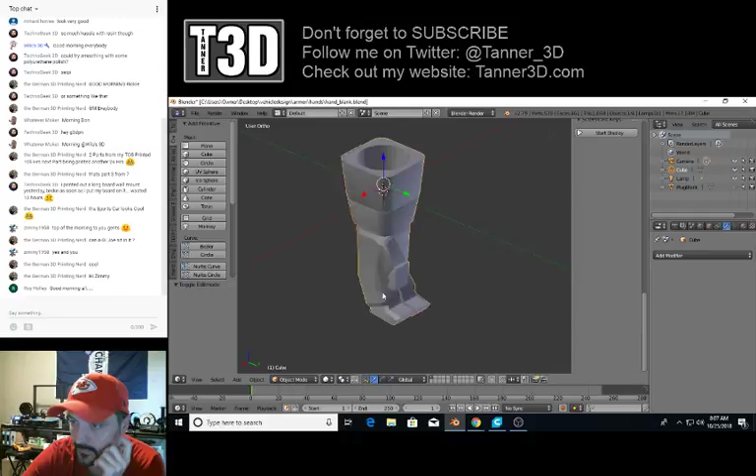Let's go to screen share. Let's move the chat over here. Pull Blender up - you can see this is where I was working on the gauntlet bionic hand claw thing for the G.I. Joes. There it is. Save it before I open.

What did I do with? Oh, there it is.

But yeah, I did the same thing with this big truck - I started with the Jeep and just started stretching and manipulating the vertices to make this big truck. So that's what I did for the sports car - I squashed it and stretched the front end, and then for this, I just kind of blew everything up, made everything bigger.

Yeah, I don't know, I don't have everything really organized today. So yeah, on this I still have to address the back door and the back bumper and the attachment points for the box.

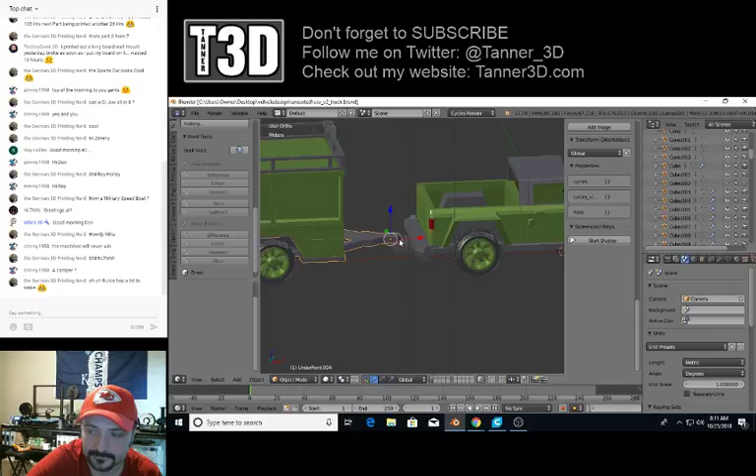Which I made a realization with the trailer. I think Roy Holley's already probably started printing his, but I'm going to have to make a different trailer frame for different vehicles. There's just not going to be any way around it because of the height of the bumper. The lower bumper is going to need the flat frame.

Yeah, more stuff to make than I will ever have time for. But yeah, I'll make a slide-in camper shell for this, like the big campers, like the one my father-in-law used to have, the great big thing you can sleep in and stuff. I'll make one of those for it, and then of course regular camper shells, roll bars. I've already got a lift kit for the Jeep that should work also for the truck. Should.

I stayed up way too late last night watching Ben Craig play video games and chatting with him on Facebook. He's playing Quake Champions. Pretty cool looking game.

Oh cool, True Tech. Yeah, I've seen those. That's where it's built on the little Toyota truck, but they put like a 1-ton suspension on it, right? I always thought that was cool, that when they take those little trucks and put big suspension under them.

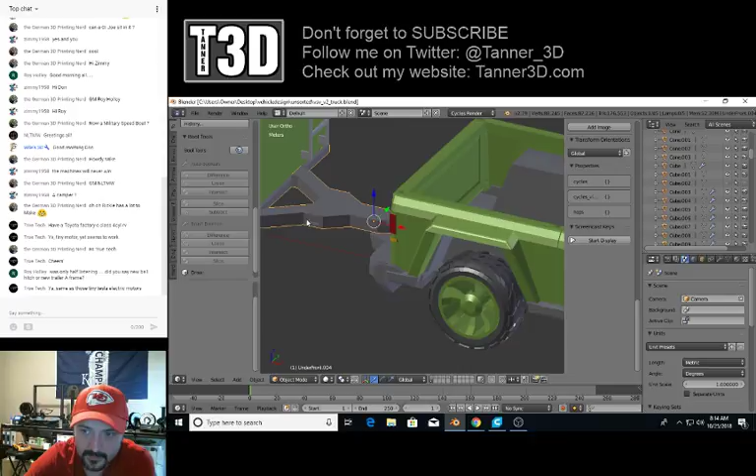New trailer frame. Well, more than one trailer frame. So it's going to have different, either that or I'm going to have to separate this front piece of the trailer from the rest of the frame so that you can choose which one to print.

Now, the thing I'll say about gearing making a difference is you have a tiny engine, you can gear it up to have more power, but a smaller engine is going to typically wear out faster working harder. That was the case with my 1985 S10 extended cab 4x4 when I was a teenager - it had that 2.8 liter V6, and that combination of gearing and stuff, it wasn't enough engine for that truck.

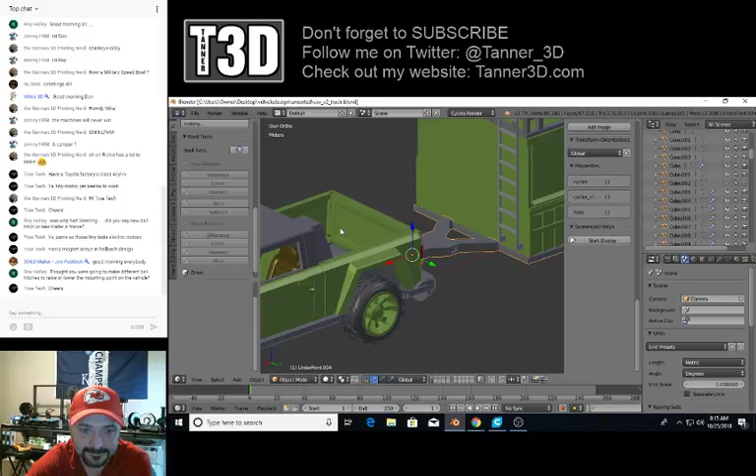Morning, Joe. How'd your work call go last night, man? Oh, till 3 a.m., dude. That sucks, man. I bet Joe wishes it was more good night than good morning. He just got done working a few hours ago - are you on your way into work now, after being up last night?

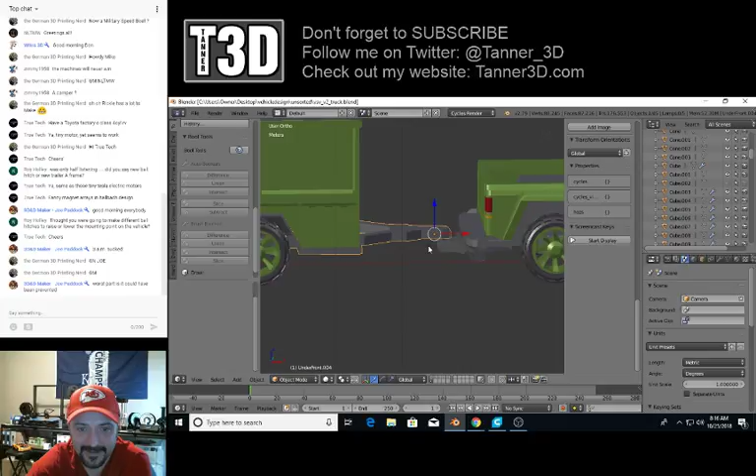Most things like that can be prevented, really.

But yeah, I tried using the trailer frame that goes up like that - I'll just show you. I'll copy it and go back to the truck, paste it. So yeah, I tried it, but then I had to make a hitch that went way up like that, and it looked really funny.

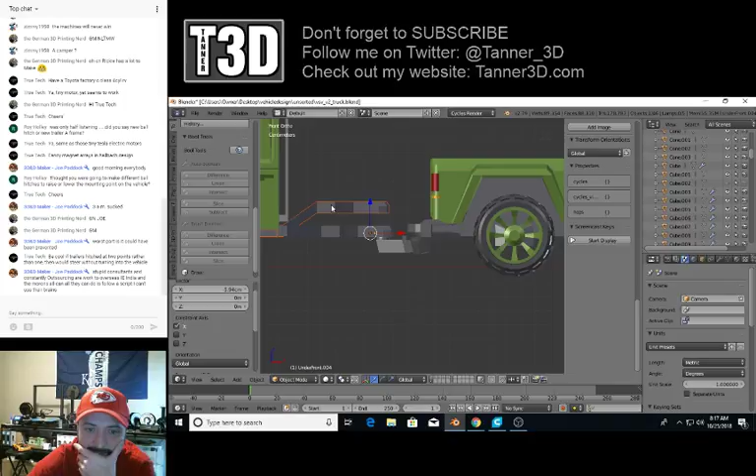So I may need to look and see if I can do the flat frame and make a hitch that works with the Jeep and the lifted Jeep with the flat frame, which would mean changing up the hitch. But that shouldn't be a big deal to reprint because the hitch is small. But if you've already printed the trailer frame, that's going to suck.

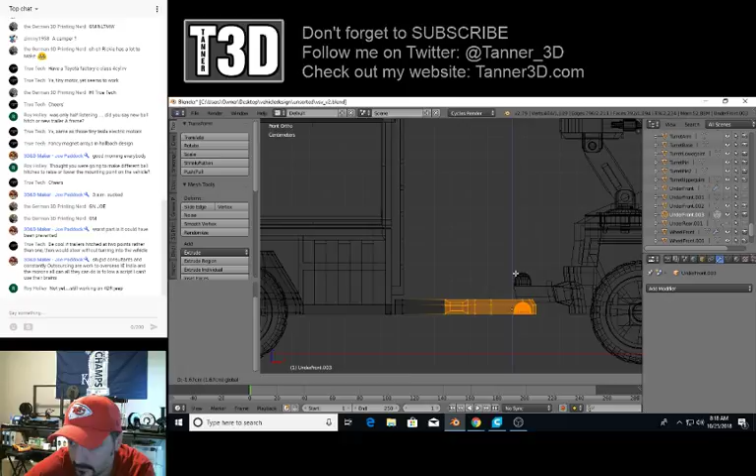Oh, okay, well then maybe we still have time. Let's do this, let's flatten this out. Grab the whole trailer - oh, tab out. Grab the whole trailer. Slide it back some. Now let me investigate what I can do here.

Although, wait, I could be looking at this wrong. Let's do this. But separate that out right now.

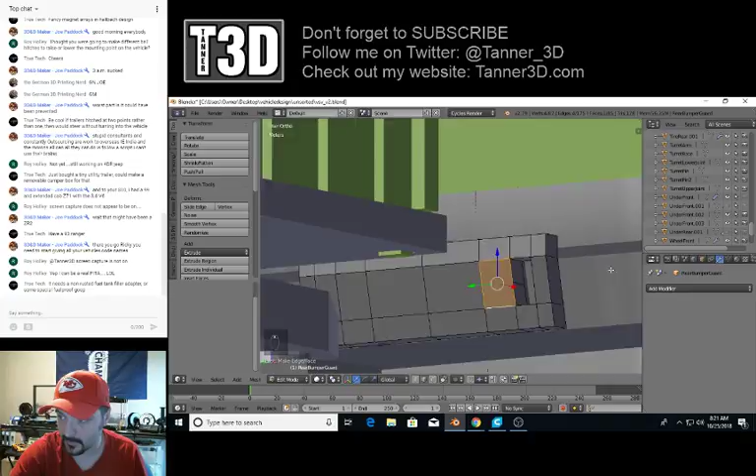No, Joey. Wait a minute. I didn't want to... That one I didn't want to make a face on. That one's... okay, cool.

So instead, I need to look at this as... extrude. Oh, not the Y. X. There we go. X. You think of this as this sort of thing here.

Wait, let's do that. Extrude it out again. Not like that.

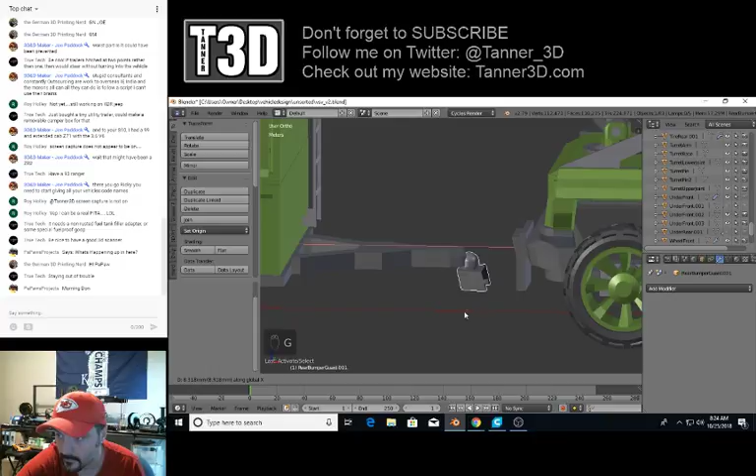Alright, so if I think of the hitch as having a drop more like that, then... not create tools, join.

Huh. Yeah, I have no drafting skills. Up here, make those line.

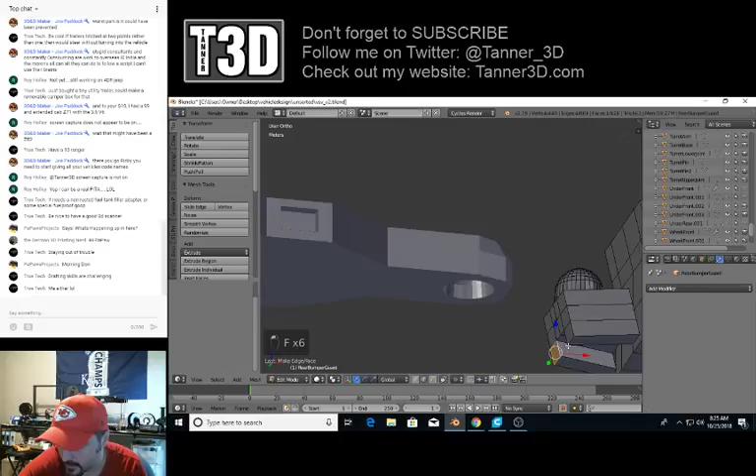Well, thank you. Thank you, True Tech. Appreciate that, man.

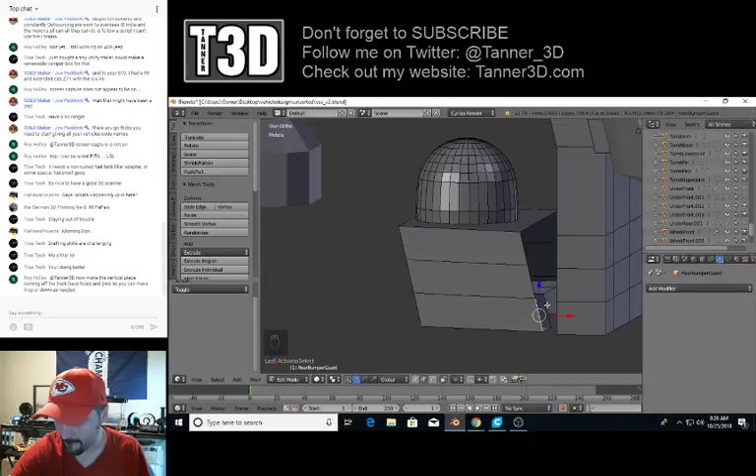All right. So then we can let me get rid of that face. That face, that face, that face. I think this will work. Hold on. We'll see.

Do that. Go here. Select that. And that. Select that. See if we can bridge these. Kinda, sorta.

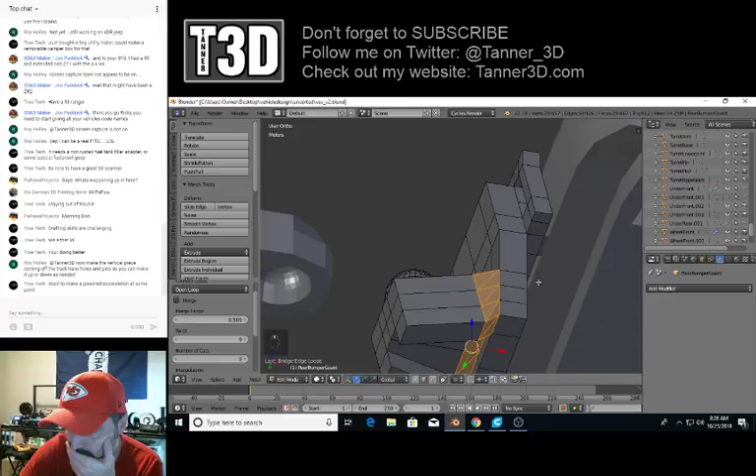It did some funky things there, though. Let's undo that. Looks like we're gonna have to manually bridge them because it's not gonna want to do that. Try it again. No. It can't reconcile that properly. So we'll manually go through and bridge each one of these.

Oh, that's why. Not the same number of faces. Alright, it'll be okay. It'll be okay.

Okay, Marty. Alright. So if I think of the drop hitch more like that,

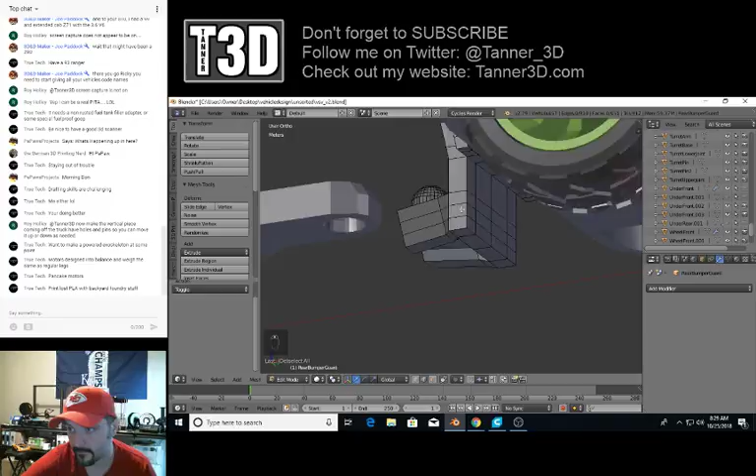But I think this solves our problem of the trailer, and then I just put up the flat one of these, and then we just adjust the length of the drop according to the height of the vehicle.

And then you print whichever. If you're printing the truck, it'll have less drop. If you're printing the standard Jeep, it'll have the medium drop, and then if you're doing a lift kit, you'll print one with the big drop.

Yeah, that's it, for FDM printing anyway. You start talking about pretty small holes and pretty small pins, and pins that small, you might put them in once, but you're not going to pull them back out and put them back in repeatedly without breaking them. It's just the nature of it.

And I've been trying with my designs to avoid needing any hardware or parts that aren't 3D printed.

My concern right now with this is being able to take the tension of pulling the trailer, and thinking I may need to do something like

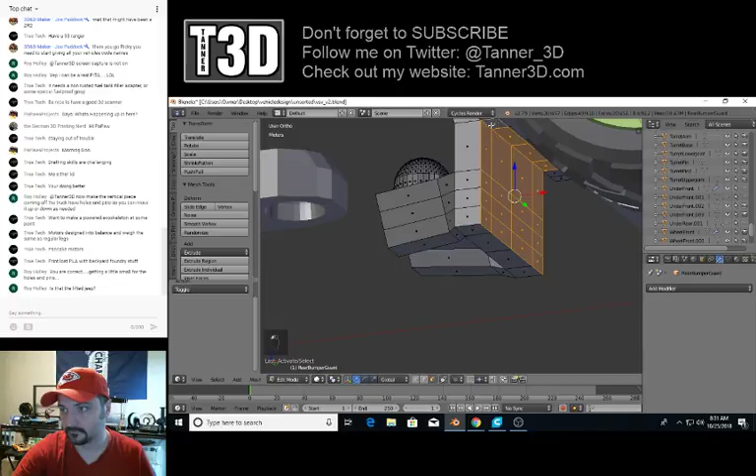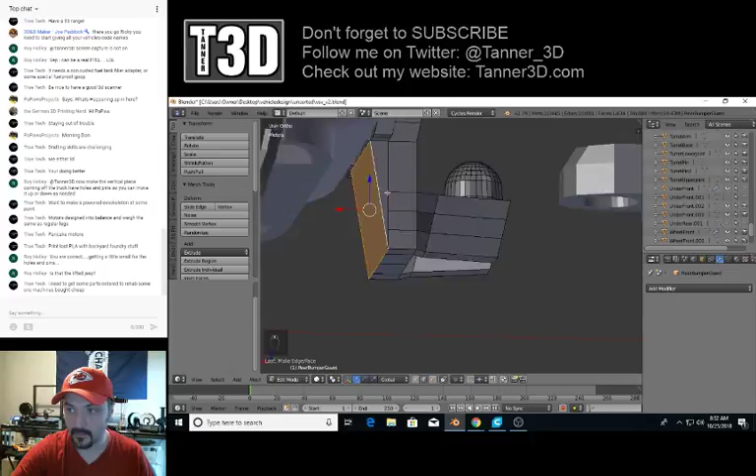It may be better to do something like this, right? Here. That would give it a little more strength.

Yeah, I seen Inside the Mind of Matt does a lot of that Lost PLA Foundry stuff. Anyhow, so I think, yeah, Inside the Mind of Matt's got a lot of, got several videos on doing Lost PLA Foundry stuff. So yeah, check him out if you haven't. He's a good dude and awesome maker.

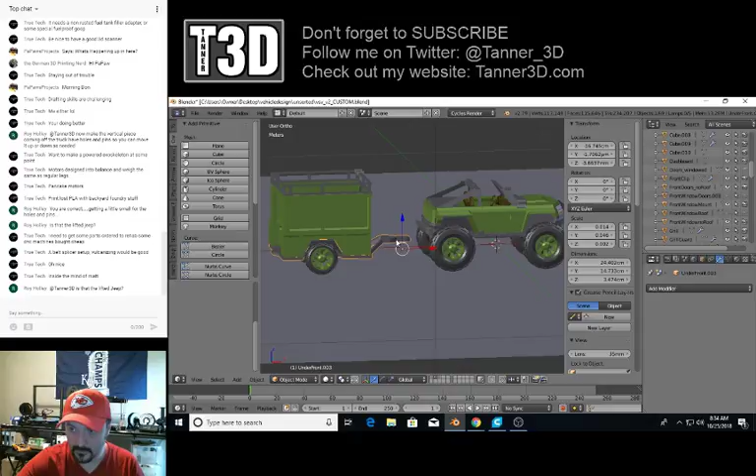Let's hide that. Let's tab into that. Let's flatten out the trailer. Tab out. Paste. Into that. So now I should be able to literally take and just drop that.

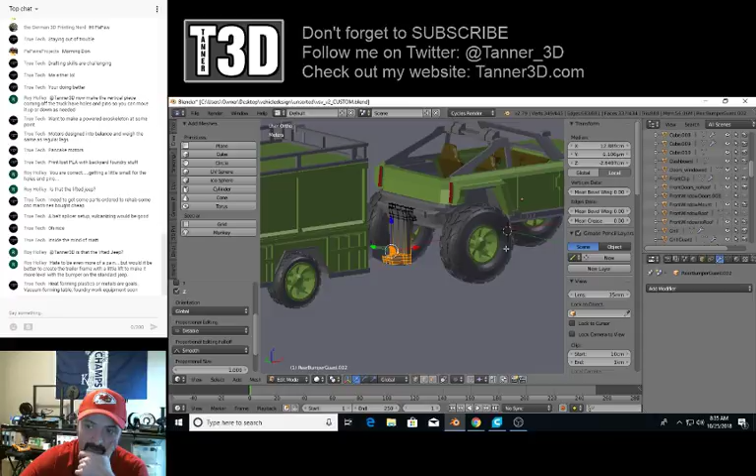Now that's really a deep drop. Yeah, it might be. I was just sitting here thinking the same thing. Alright, let's move that up, back up to where it was.

Let's take, let me hide this plane. X. Let me see how far out we are from being able to take

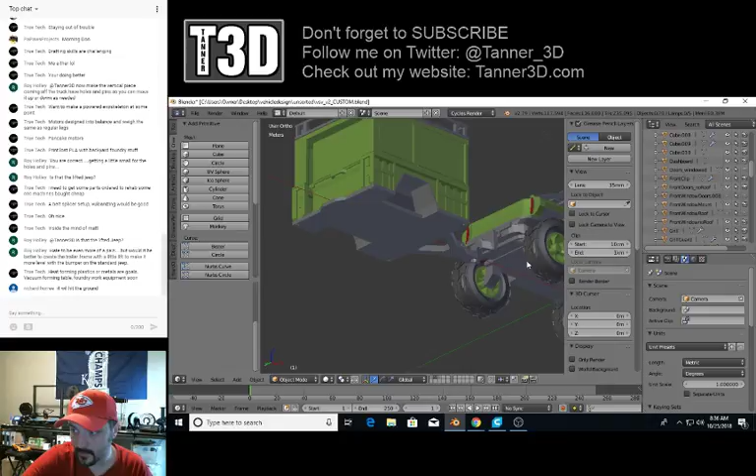Hold on. Let's hide these first. Hide those. Now let's copy those. X.

Select all this. G. C.

Yeah, the smaller wheel well opening is going to be a problem with that, huh?

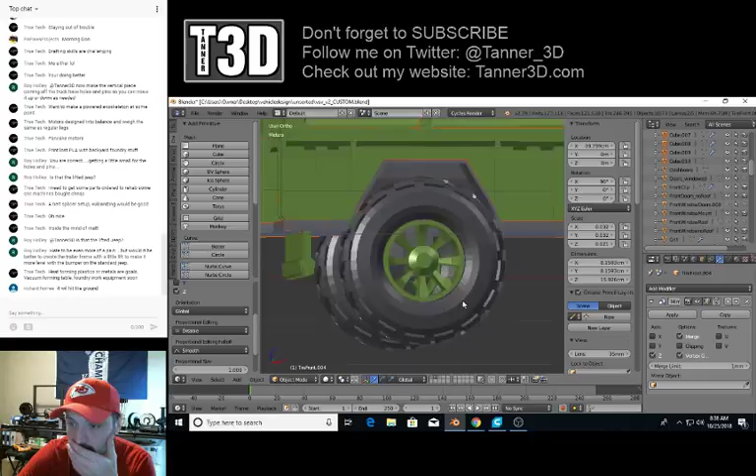Oops. Forgot to grab the back doors here. G, O, Z. Didn't grab the tailgate. Dadgummit.

Move. No. There we go. All right.

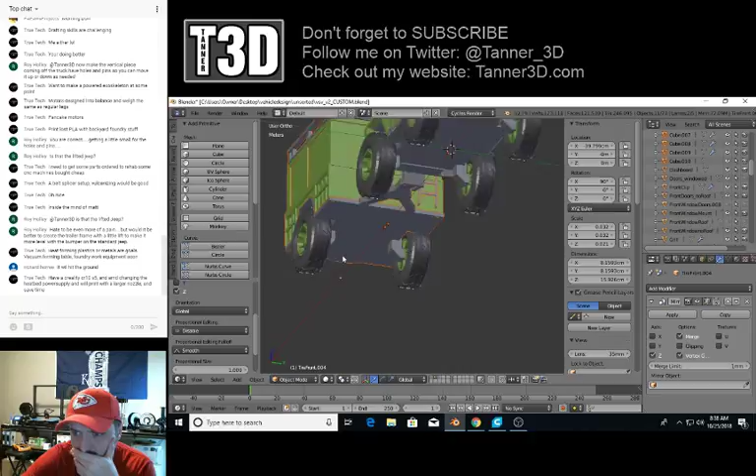So now the question becomes, we modify that wheel well opening without endangering too many things.

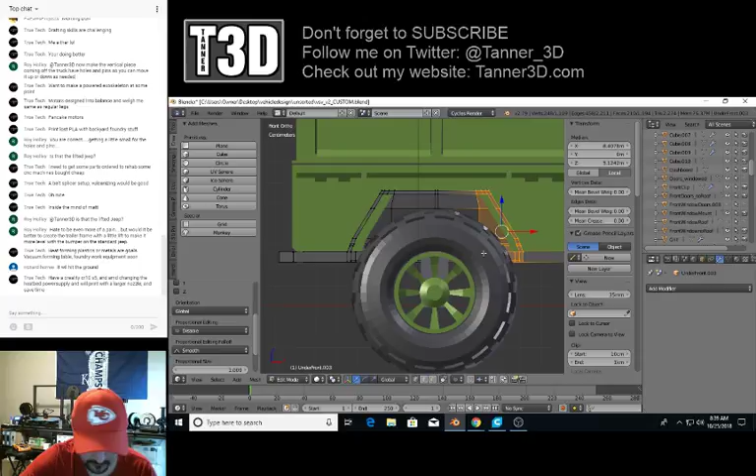Let's see. Let's see what we got. There doesn't have to have a lot of clearance, just enough. All right.

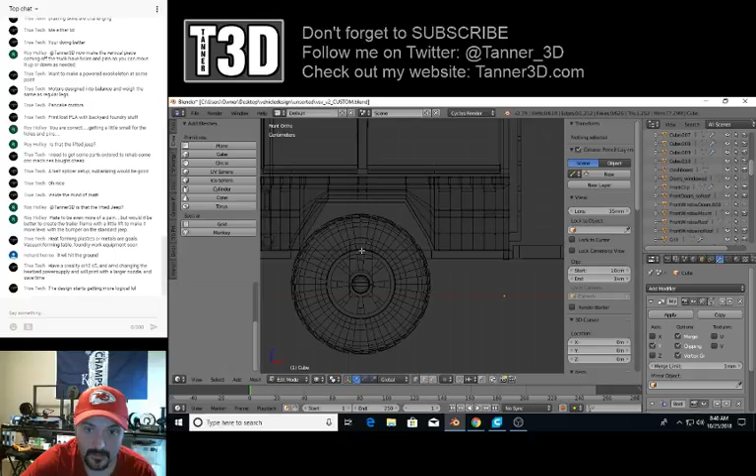G and the X. That right there. Whoops.

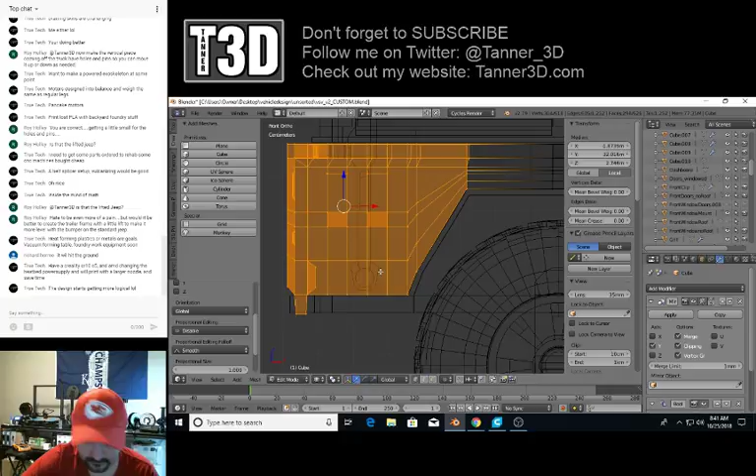This is starting to become a bigger hassle than I thought it was going to be, because now you're talking about modifying so much. Well, that would work. Oh, now I gotta stretch that back too. Gosh.

All because I made a truck that had a lower bumper. It's like that old story song thing, the old lady that swallowed the fly. Then she swallows a spider, then she...

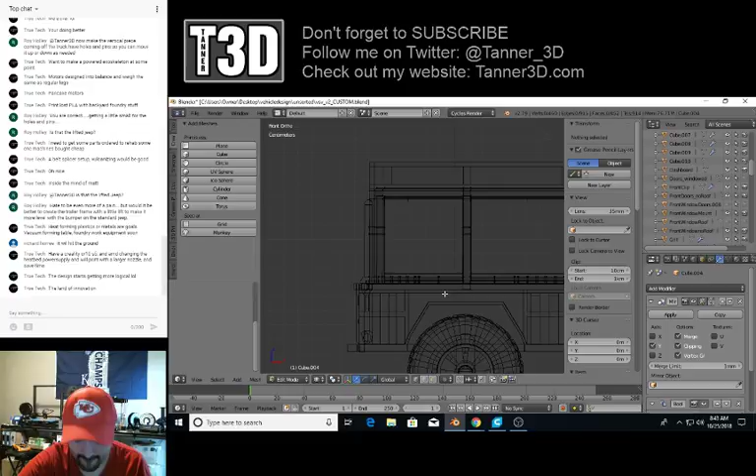How's it doing? All right.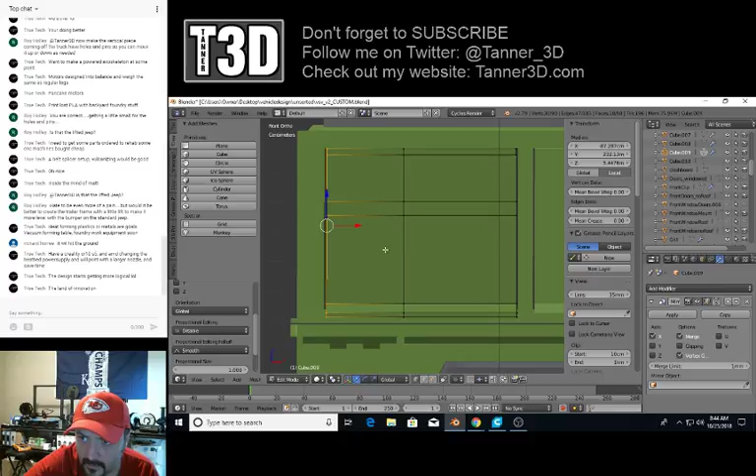Well, doing that would allow you to put the same lift kit on the trailer that you can put on the Jeep. That just means I need to go pull down the trailer files that are up, because now the whole trailer has changed, not just the frame. But I can do that, because I doubt anybody's printed it yet, since Roy says he hasn't started printing that yet.

So let's go there. Let's go to delete, delete, delete, delete, and delete. Okay, everything on Discord associated with the trailer has been deleted.

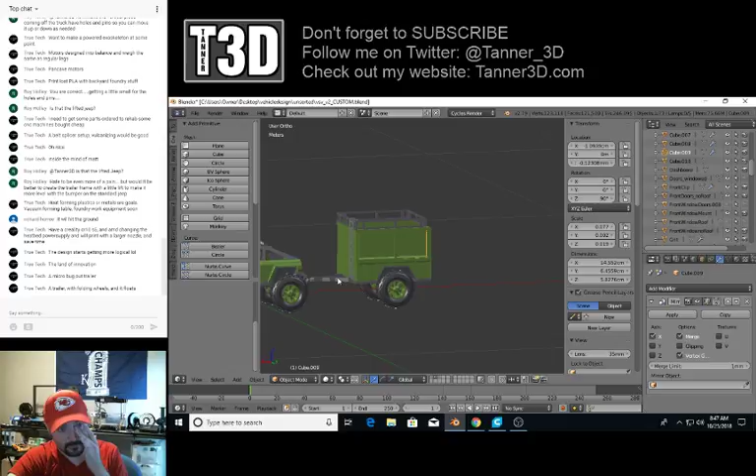My allergies are killing me today. Trailer folding wheels and it floats - was it 3D Printing Doctor that is making the DeLorean with folding wheels? I thought that was kind of cool, that Mike Whaley is printing out right now.

But yeah, at least doing it this way will give the option to use the same axles, wheels, and tires, whether lifted or standard, on the trailer that you use on the Jeep and the truck. It's probably the best way to do it anyway.

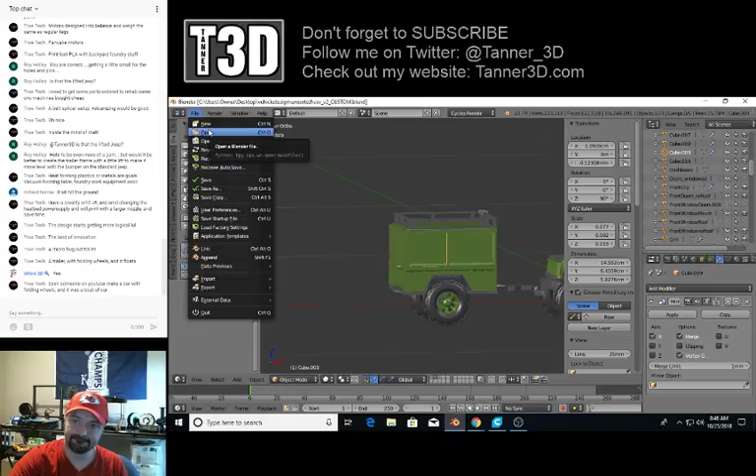All right, so there's that. Let's save. I needed to work on them. Nope.

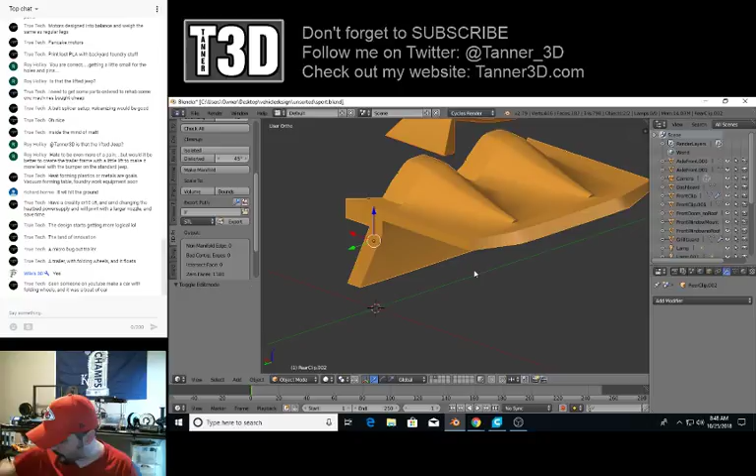Oh well, that's weird. Okay, well, I'm not exactly sure how to explain that. When I printed that out, it printed supports and everything underneath there, and then this has a definite curve to it. But when I open the file to look at it - oh, there's the curve, never mind, I see it now. It doesn't need that curve. I must have accidentally dragged those vertices out at some point. We'll fix that side and we'll just mirror it.

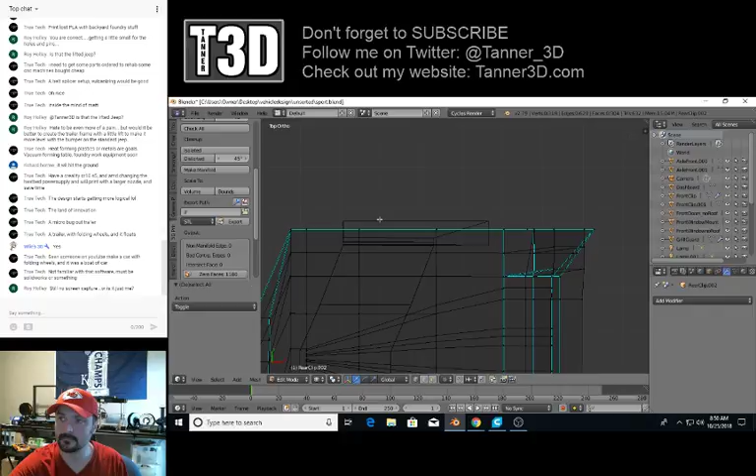This is Blender, TrueTech, Blender 2.79B. 2.8 is due out soon, and 2.8 changes a lot of stuff. Blender is awesome because it is very, very powerful, but free.

No, it's every time I change - Roy, every time I change to a different project, it's got to be restarted again. No, Joseph, you cannot have that.

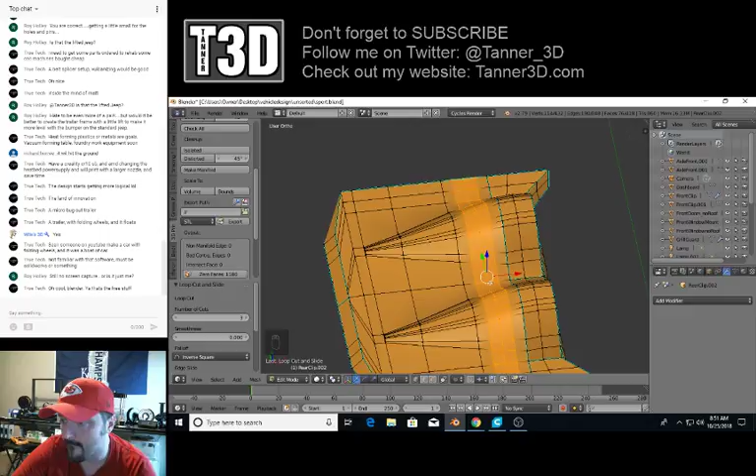Which I also noticed when I went to print this out, that it had some artifacts it created in the STL because there wasn't enough geometry for it to smooth it out. So cut a few more extra lines in there.

I need to order some more filament myself. I need to order some more silver because I'm almost out, and then I need white and red. So I need to place an order myself for some filament in the near future.

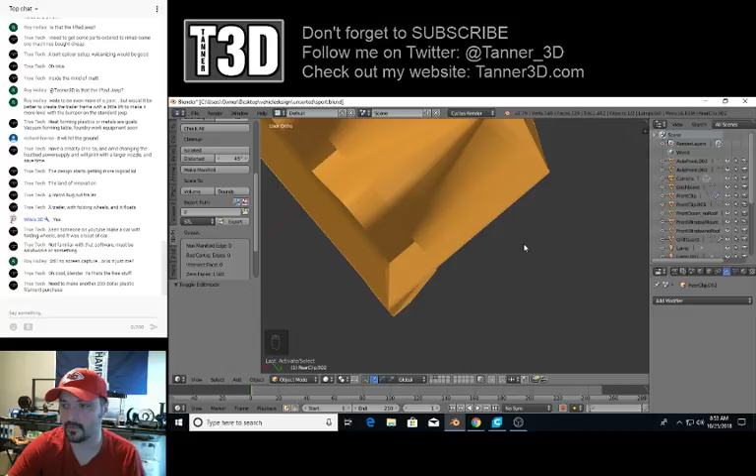Yeah, adding more to the geometry, making the geometry more complex, allows that to smooth that out better.

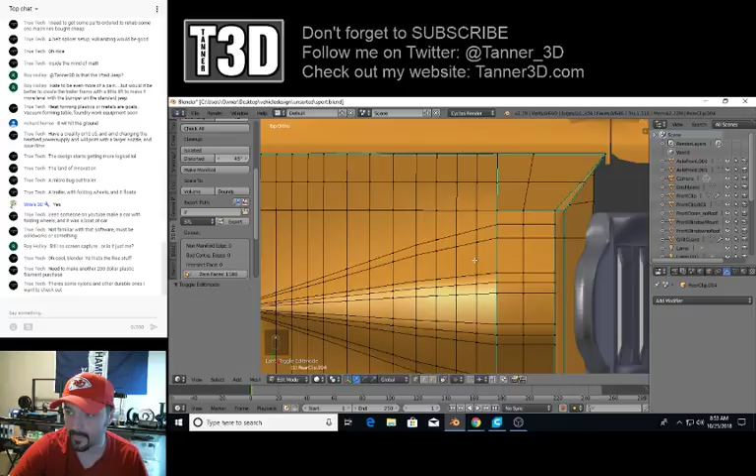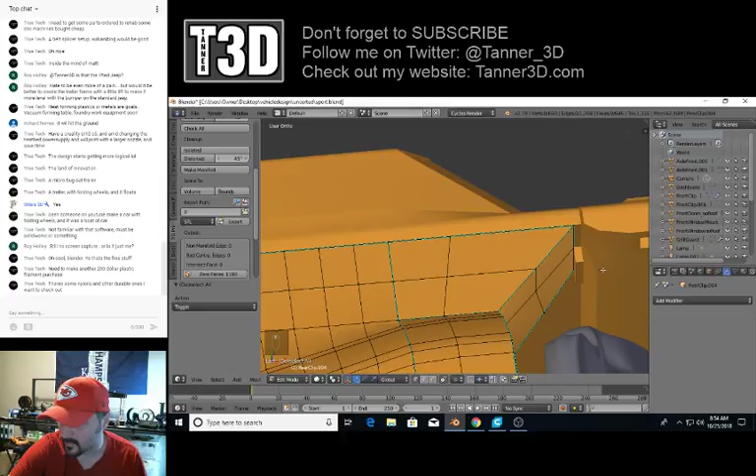Alright, so we're going to copy that, go back here and hide this one, paste this one in, and we're going to close that gap up some. Take - I also noticed it interfered with that a little bit.

Later, Richard. Thanks for hanging out today, man.

Dang it, there's 7, there we go. Delete vertices.

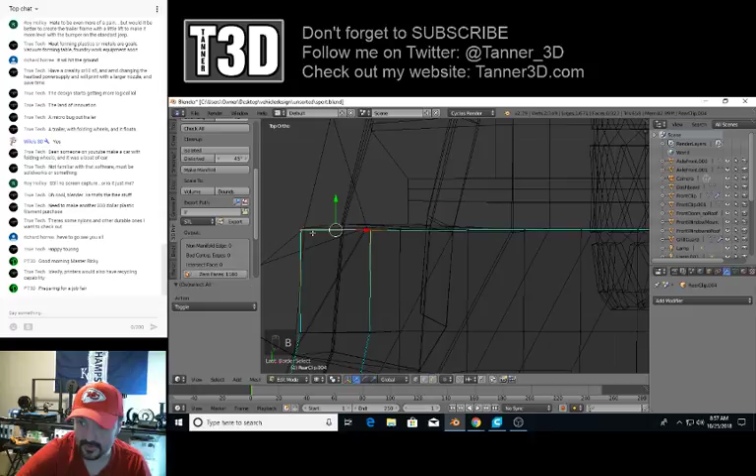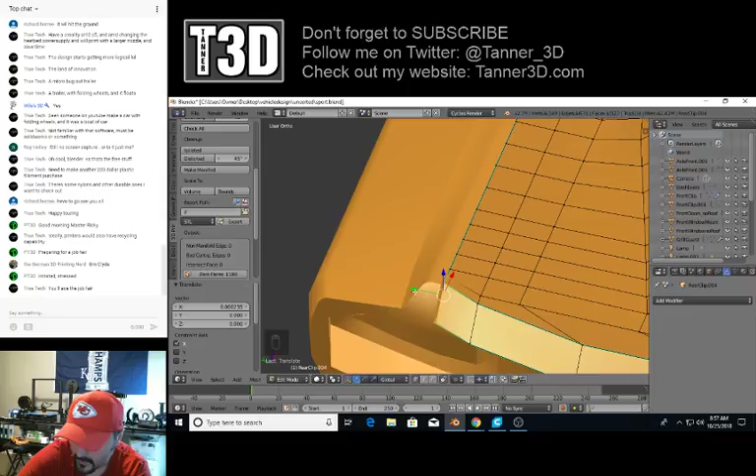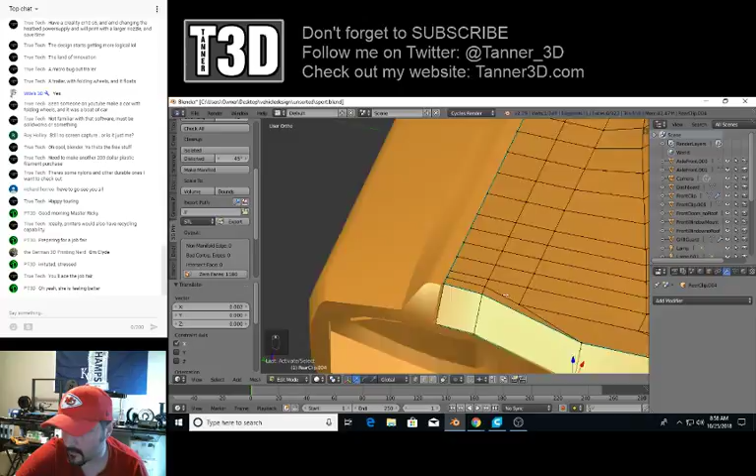Morning, Clyde. How are you doing today, sir? Life is treating you good, my friend. Job fair, yay. How's your wife feeling? She feeling better? I know you said the other day she wasn't feeling well, so hope she is doing better. Good, man. It always sucks when the ones that we care for are not well.

Add a mirror modifier. Y, not the X. Add clipping. And apply.

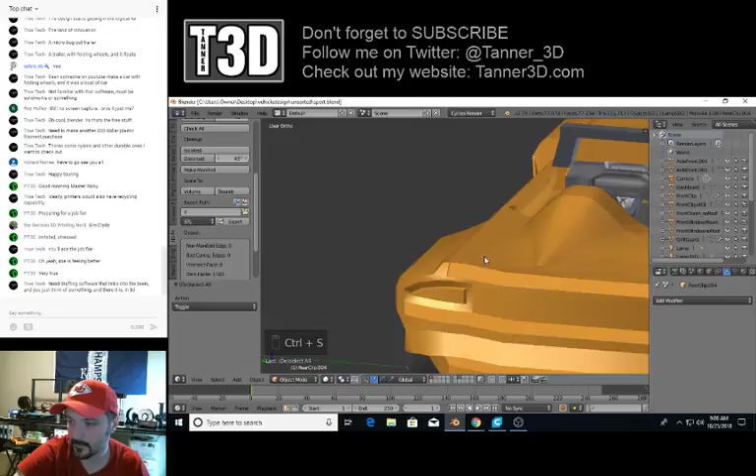Alright, something I realized I was doing in Blender that could have saved myself some time that I didn't realize I could do until yesterday. So I'll share with you guys, because like I said, I'm still learning this stuff too. I had never paid much attention when I was exporting to one little checkbox that makes my life a lot easier. So before, when I was ready to export STLs and whatnot, I was taking each individual piece, copying it into a new file, and then exporting it as an STL from there. The realization I made yesterday, which makes my life a lot easier, is all you got to do is - wait, let me check. There's something else I wanted to check on that before I export this piece. One more thing I needed to check.

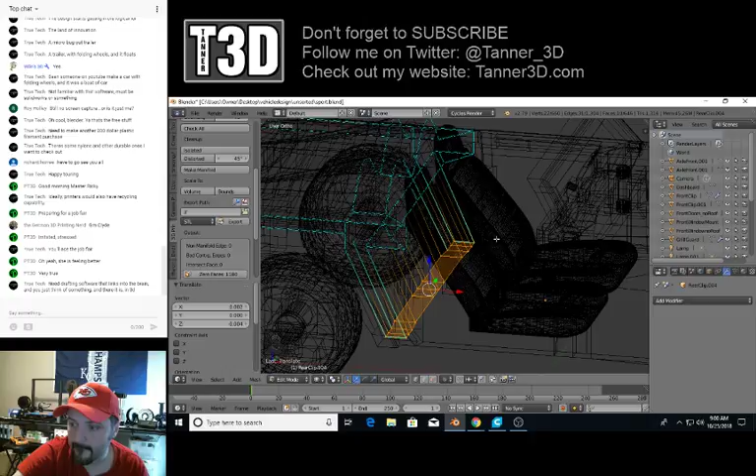Save, okay. So when you're ready to export stuff, here's a trick to make your life a lot easier. You click the piece you want to export, just the piece you want to export. See, now I got this trunk area here selected. You go to File, Export, STL. There's a little checkbox over here I hadn't paid attention to, to export only the selected object.

Life made easy. Rear lid. Done.

So I didn't realize I could do that. Before, when I tried exporting and didn't realize there was a checkbox for the selection, it exports everything, even hidden objects, into the STL. But if you check that box, selection only, it exports only the selected item.

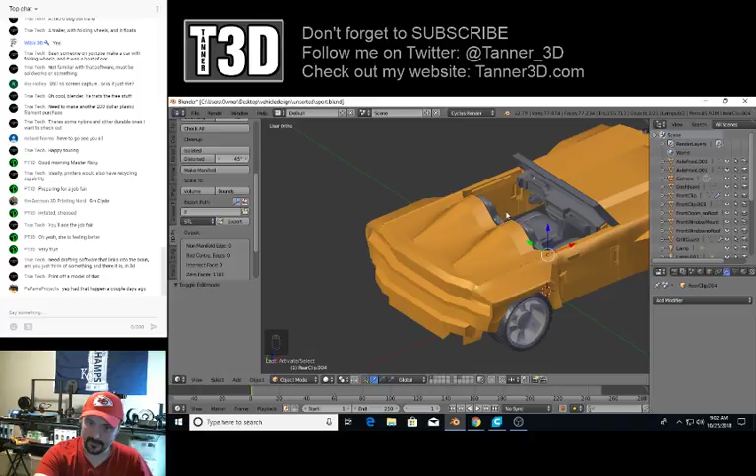So yeah, the next thing to print will be the... The first time I did that, I went, that's not what I wanted. I brought it into the slicer and it was like the whole scene. I went, no. So that's when I started, I'd copy the item that I wanted, open a new file, paste it in there, and export just that to make sure there wasn't anything hidden.

And then yesterday when I was making this stuff for the G.I. Joe figures, I saw that over there and I moused over it and it said, export only the selected item. I went, oh, that's so handy. Why didn't I see that before?

Yeah, there's a new slicer out there, TrueTech, that's like $20 a year, LuBan, that will automatically slice stuff up into smaller pieces for you and automatically add the registration keys to line it back up. It's pretty cool. I haven't tried it yet, but I'm gonna have to, because I think that would make my life a little easier on some of my items.

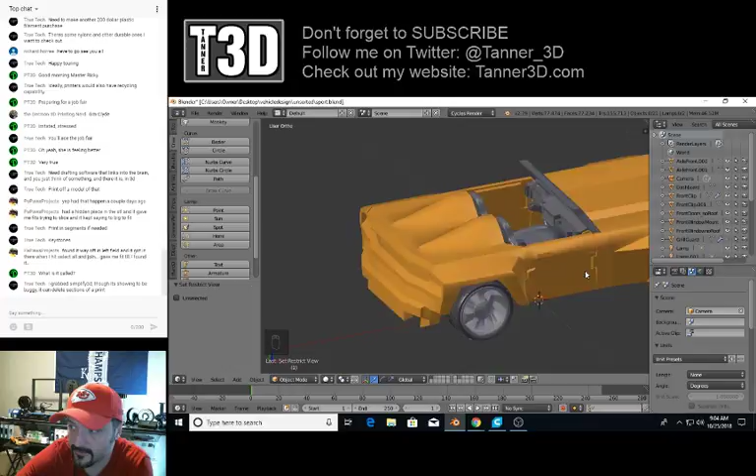Oh, this isn't actually part of the model, this is just, I was looking to see what if. So when I get the hood done and print this other piece that we just worked on this morning, I will have this much of the car printed.

Exactly like this here. And with the way the front end flares out like that, that's why I said I've been thinking about calling it the Hammerhead, because I think it's kind of got that hammerhead shark kind of vibe with the front end flaring out that way.

Well, that's all right, Robbie. Stream last night went okay, we had some fun, you know, sang some songs. That's what it's all about.

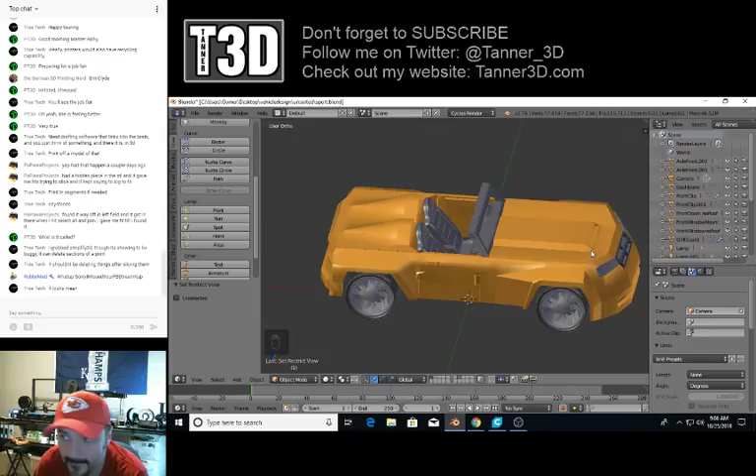Well, TrueTech, I don't know if you've seen when I did it, but this actually started off as the model of the Jeep. I just started squashing some things and stretching some things and made that.

After I got done with it, I thought it has a little bit of the flavor from that concept car that Dodge made back in the 90s, the Copperhead.

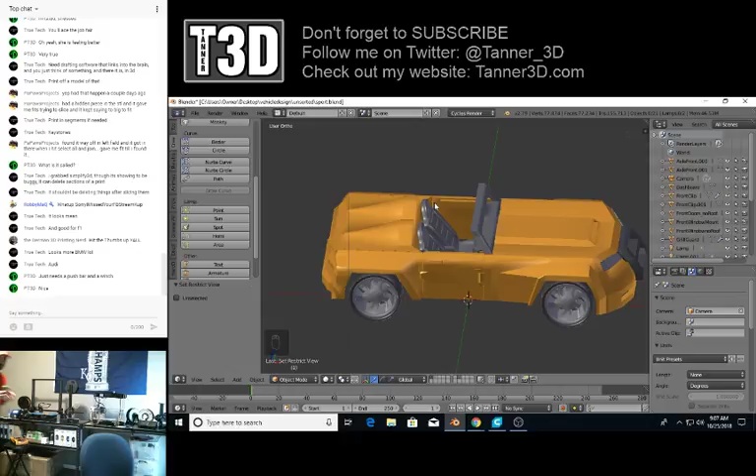Yeah Clyde, I was thinking about adding that to it, and making a version that has that and a roof and the flat deck, and putting a turret on the back of it. So then it would be kind of like a quick strike scout kind of vehicle.

Because, you know, G.I. Joe had more absurd vehicles throughout their years.

We're getting close to release day for the standard Jeep. November 1st is when I plan on putting that on Thingiverse and making it free for everybody. So this is coming soon. Patreon supporters have had access to it for a while, and then they'll still have exclusive access to the four-door Jeep and the turret and stuff like that.

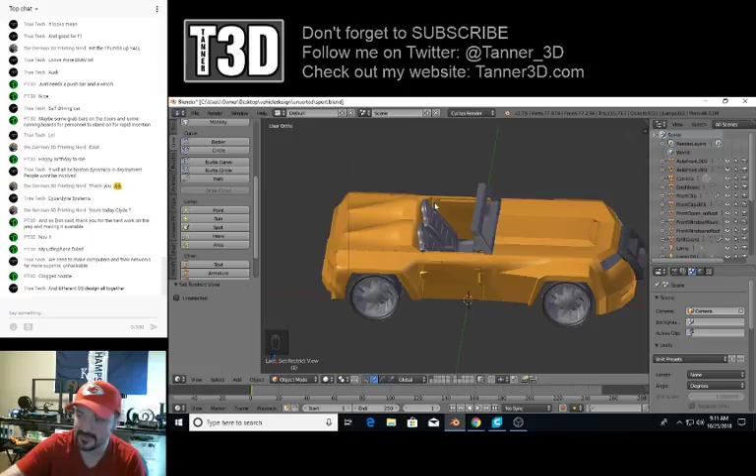I stayed up too late last night. Dang you, Ben Craig, and watching you play video games. I was like, oh, that looks like a cool game, I wish I could play that game. But I actually don't wish I could play it, because if I did, I would spend even less time doing the things I'm supposed to be doing.

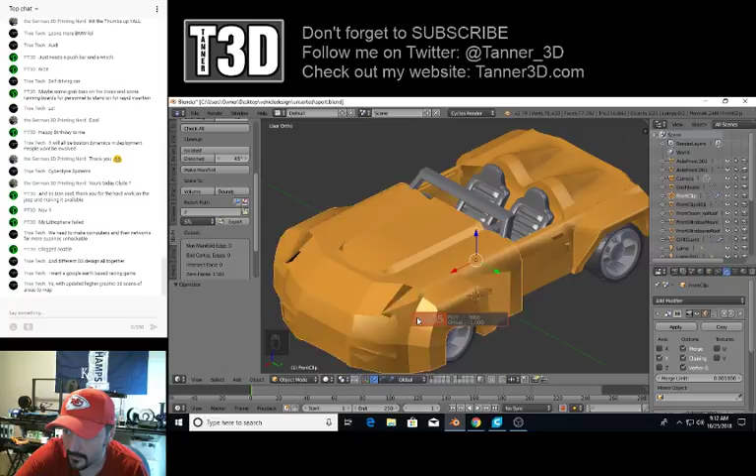That would be cool, True Tech. Wow, that's cool. That's crazy.

This menu is Hard Ops stuff, which I haven't even begun to play with some of it. Hard Ops and Box Cutter were two very cool add-ons that I purchased.

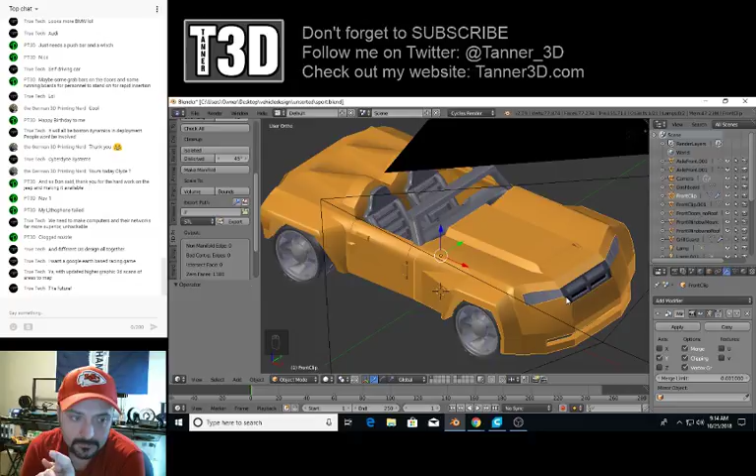They do things to your model that you could do through free processes within Blender, but they're time intensive and more difficult to do the free way. Hard Ops basically turns subdivision and adding creases and things like that into a one button press intelligent operation.

It can tell which surfaces should be left as sharp edges and just does it. If you decide that an edge they thought should be sharp shouldn't be, you can go into edge select mode, select the edge, and say we wanted to take the crease out of that. Which I kind of do want to take the crease out of that, but I've already printed it now. It's too late for mine, but it won't be too late for somebody else who decides to print it in the future, because that crease there was too sharp.

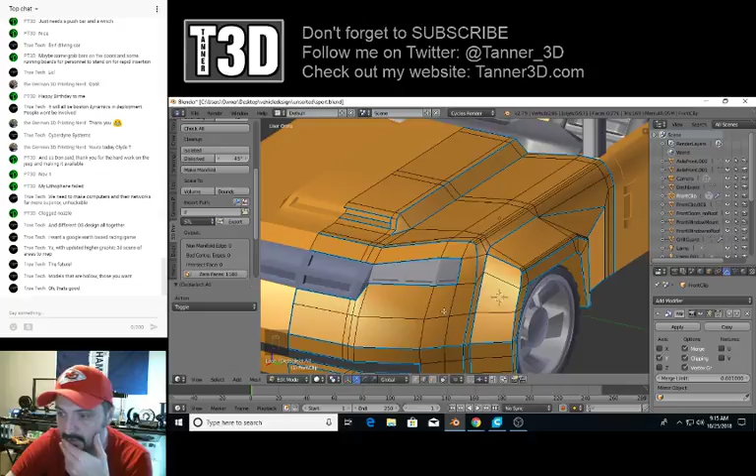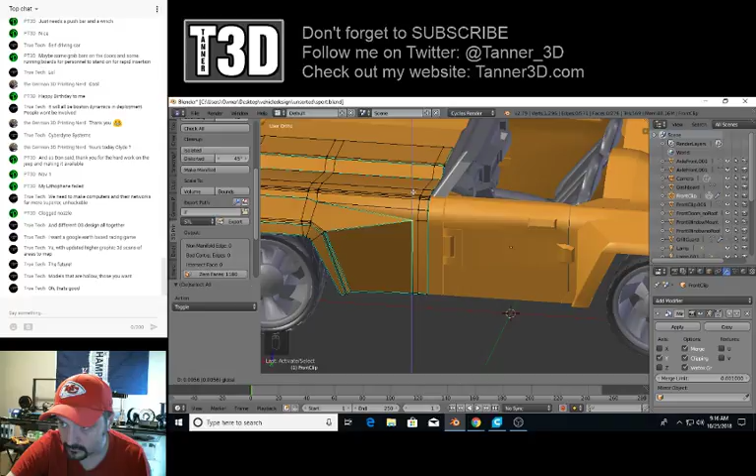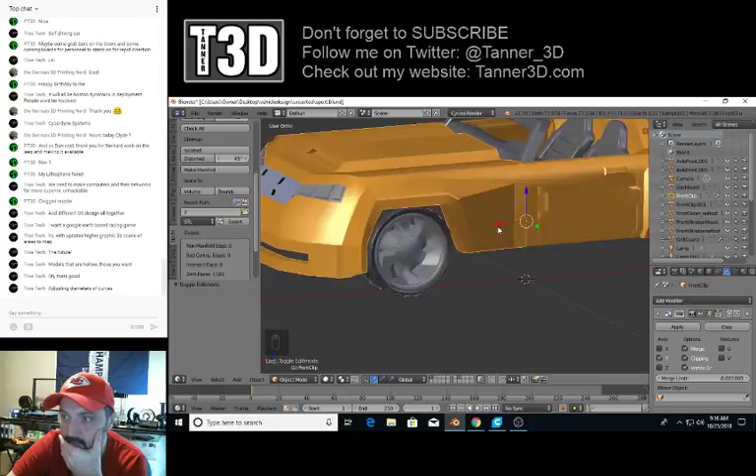Let's see what it would look like if I took the hard edge off. I don't want it on that, let's take it off and see. It's too late for mine on a couple of these changes since I've already printed it without reprinting. But when I release it to you guys, let's take the hard edge off of that and see, and then let's bevel it, see what that looks like. Nah.

I don't need crumple zones and honeycomb and stuff like that because it's not a real car, it's a toy. It's not even an RC though, this is just G.I. Joe toys. Well, 1/18 scale toys, not necessarily G.I. Joe toys, because there's nothing officially G.I. Joe about any of this. But it's designed to be my version of stuff like this.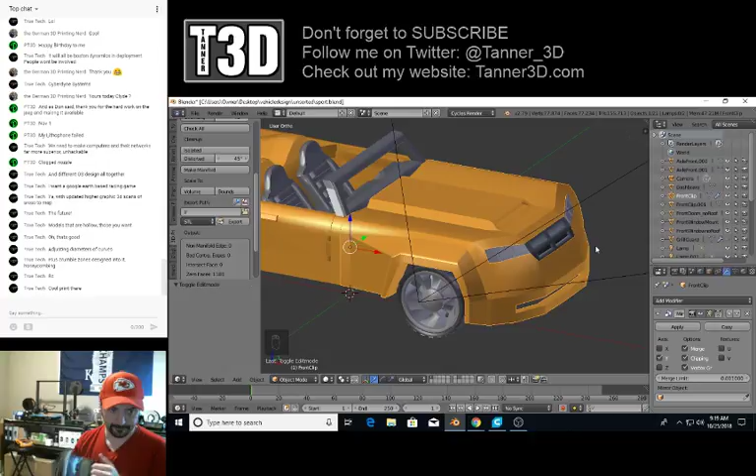I don't base mine off of any real life vehicles, for copyright reasons, intellectual property reasons, and creativity reasons. It doesn't take a lot of creativity to just copy something somebody else has made already. So, yeah, this is a G.I. Joe vehicle from the Rise of Cobra movie that I picked up at Goodwill for 99 cents.

But it's got some cool little ingenuity into it, though. You know, the pop-up gun, and then it's got a flip forward windshield armor. I can get it out of there. And then it's got missiles hidden in the back doors.

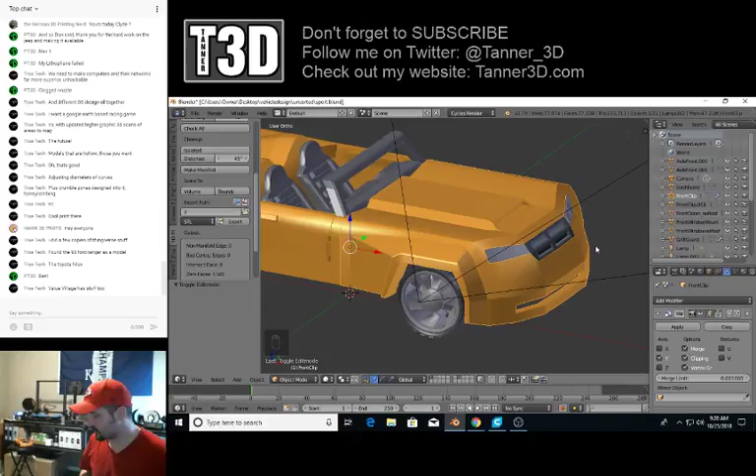I was surprised, being at Goodwill, that these missiles are removable. Kind of, but they're still in there - they are removable, I just can't get a hold of them because it's too small. So not all G.I. Joe vehicles had spring-loaded missiles and stuff, some of the missiles were just, you took them off, threw them at stuff, and that's how you lost them.

Value Village, I don't think we have any of those here. Ben! Good morning, sir.

Oh, there's a 93 Ford Ranger on Thingiverse.

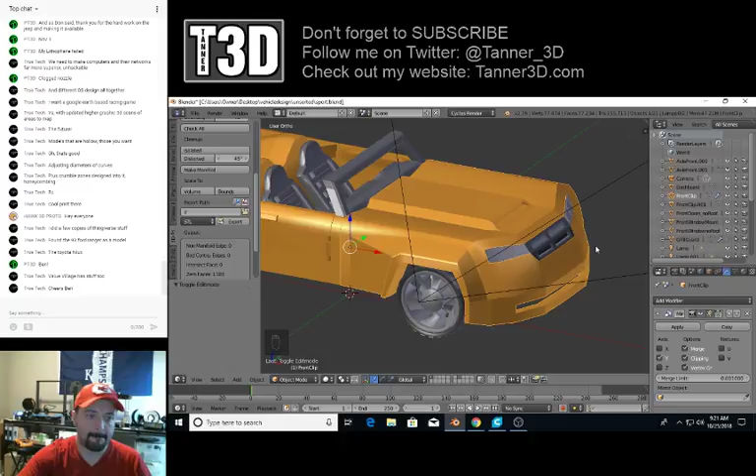Printer's a lot quieter once it gets past the support material that it kept banging into.

IC3D made a Twitter post yesterday about show us your IC3D prints. When I get this car done, I'll have to share it with them because the orange filament I'm using is IC3D filament. It's a very bright orange too, it's like crazy bright.

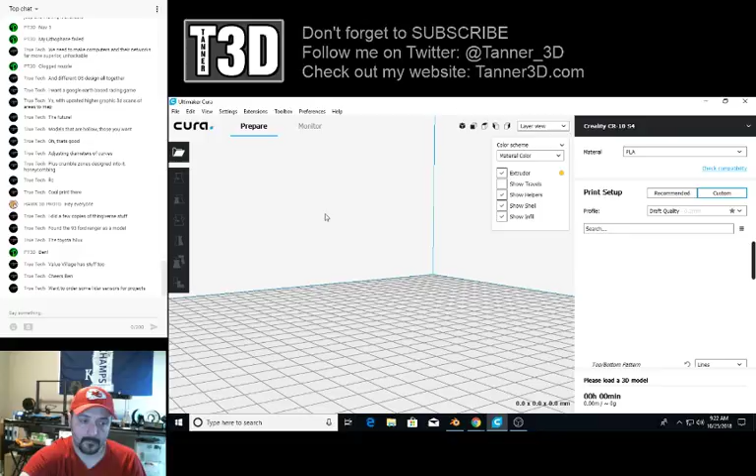Let's see. The rear lid.

Morning, Chris, how you doing man? Just fixing some stuff so I can print it later today.

It's really blurry back there in the background, but finally did get the front end of the sports car to print, and now I'm printing the hood for the sports car.

Started designing some stuff for G.I. Joe figures, and I guess you wouldn't see that since I posted it all on Twitter yesterday. The helmet, the shoulder-mounted missile launcher, and the power gauntlet weapons were all designed yesterday, and the Ender 2 did a nice job printing them too, man.

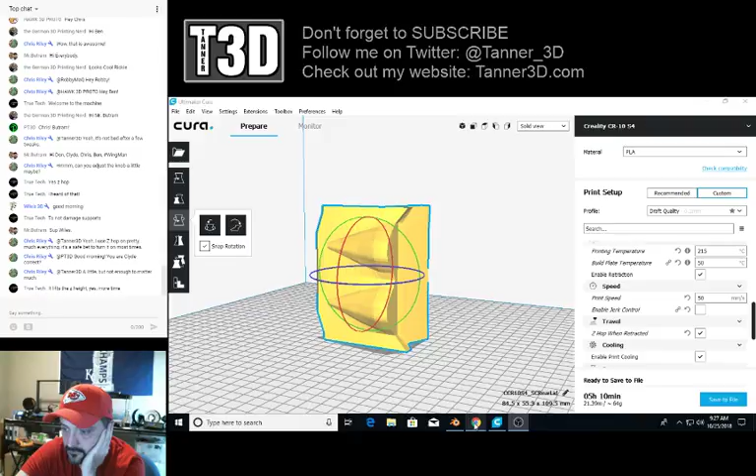Yes, PT3D is Clyde. Okay, yeah, it's got me at 5 hours on this print, so that's not horrible.

So when the hood gets done back there, I've got this to print, and then I can glue the car together, and the car will be done. The car will be done to that level right there. Right there, had to unhide that. So I'll have the physical embodiment of what you see on the screen there.

Oh, sorry. I think a nap is in my future today, because I got to work tonight.

Yeah, I hear you, Chris, and I don't have near as many people come watch my channel as you do, and it's hard enough for me to remember everybody. I can't help but say that once in a while too, Robbie. I really can't, and I'm sorry for that, Clyde. I'm sure you've dealt with that your whole life.

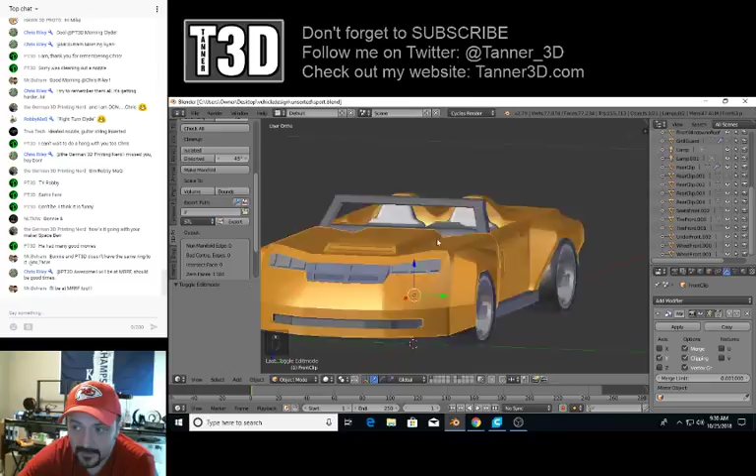I'm still kicking around going to MRRF if it would even be feasible, and if it's feasible at all, it's only for one day, and that would be Sunday. So I'm not sure. It would mean me showing up for only that one day and being really, really tired when I got there, because I would have to leave straight out from my show Saturday night, since it's an 8.5 hour drive.

They needed to pick a place to have MRRF that was close to an airport. Because if I could do Sunday, I'll have to leave straight from, I'll get done playing in Nashville at 1 o'clock in the morning. And then it'll be a 9.5 hour drive total from there, because that's from Nashville and not Clarksville. So I get done at 1 o'clock in the morning, I would get home, change clothes, hit the road, and would get there driving straight through just before noon.

Yeah, True Tech, I'm a musician for a living in Nashville. I've been a country singer for 28 years, man.